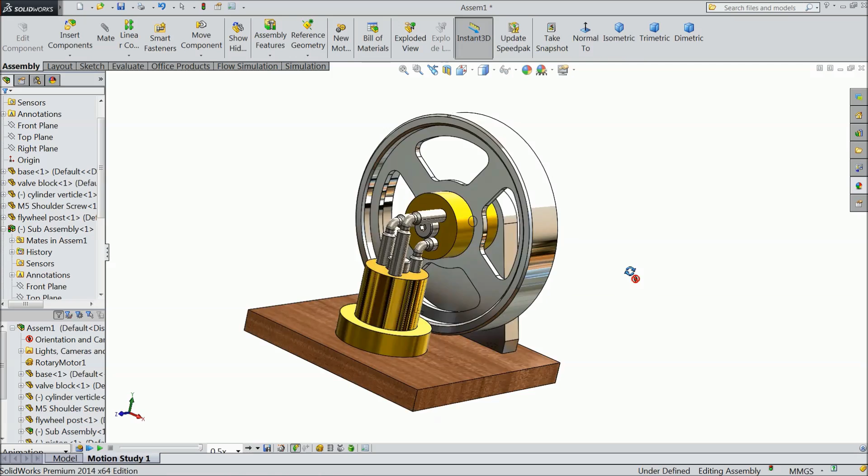Today we are going to design and assemble an elbow engine in SolidWorks. This engine we created in SolidWorks, and we will see how to. This is a very beautiful engine. We will create each and every part, and we will assemble it at the end of this video.

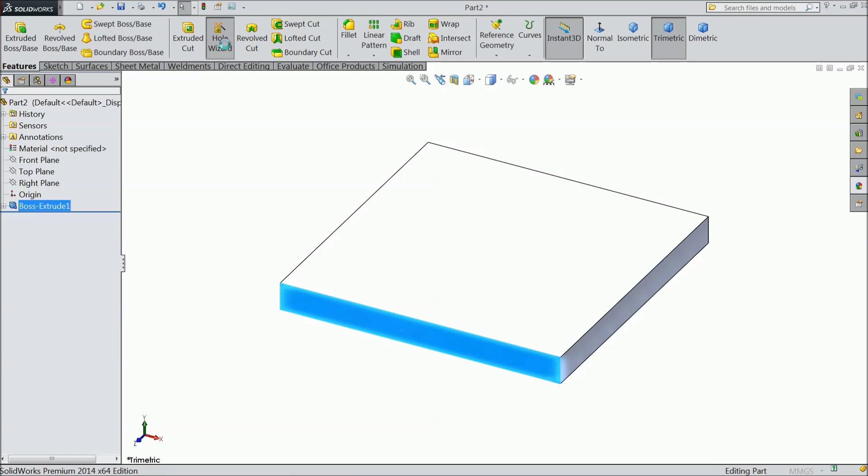Okay. Now select extruded boss and extrude up to 10 mm. Select OK. Now select this face and choose here hole wizard. Now we want to put some holes here. So first we will select legacy hole.

Choose C-bore drill. The values we will select: 3 mm, 70 mm, 5 mm, 10 mm and angle 180 degrees. Choose normal. Now select position. Put two holes. Just escape. Now select center line and draw a center line from one end to another end. Now exit.

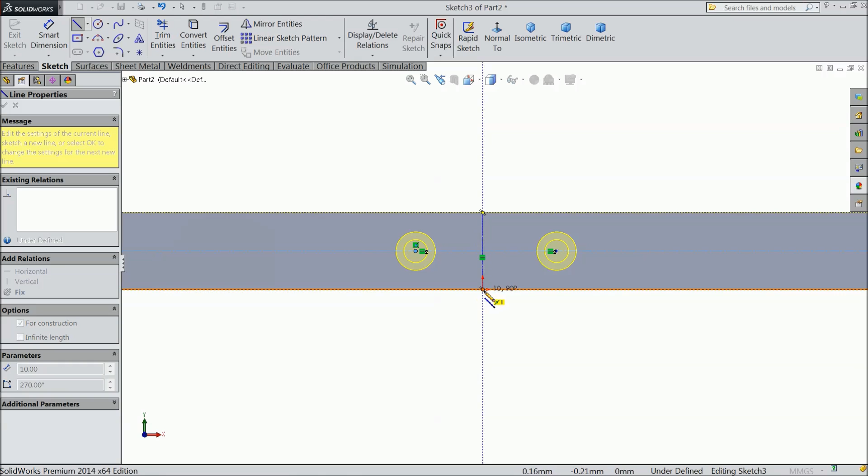Now we will make some relations. Select both the center points of the holes, make horizontal. Now select this center line, and select this point, make coincident. Now again choose center line and draw one mid line from the origin point, exit. Now we will assign one more relation. Select this center line and select both the hole points and make a relation symmetric. See here, symmetric. Okay. Now you just see it is rotating.

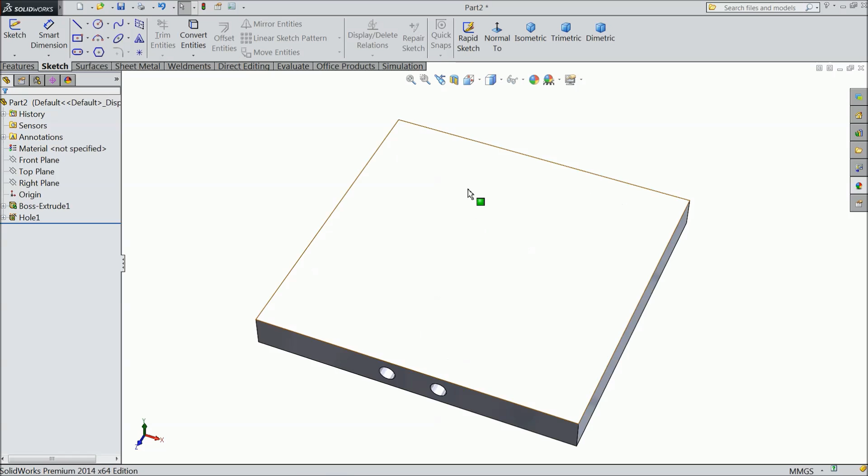Now assign distance from one end to the hole point, 42 mm. Okay, now select OK. Now this is our hole. Choose perspective. Now you can see here. See, this is exactly our holes. Now just go back, select the back surface, choose normal. Okay, this position we want.

Now go select hole wizard. And now here we will select counterbore. We want to create some counterbores. Select ISO and here select socket head ISO 4762 M5. This one keep normal and blind keep up to 8 mm. Now select position. Now put 4 holes.

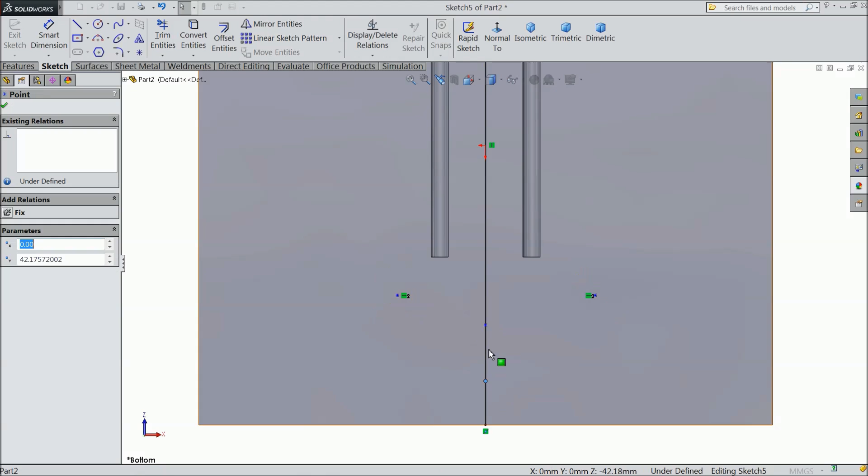Now escape. Now do one thing, draw a center line from top to bottom. Exit. Keep this position. Now assign some relations. Select this hole and this one, make horizontal. This point and this point also, reverse back. Assign relation vertical. This point and this point coincident.

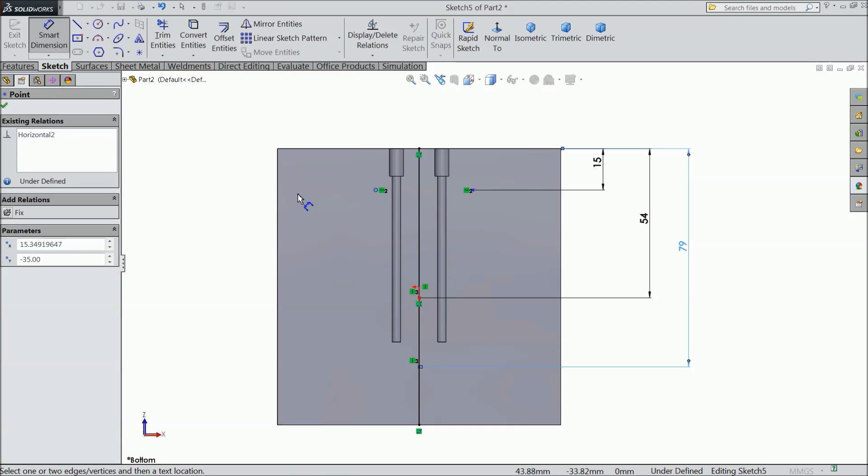Now we will assign some distances from this point to this point, cancel it. First assign the bigger one. From top assign 15 mm. The second one 54 mm, and the third one 79 mm, and this distance from here to here 28 mm.

Okay, now make one relation. Select this point, this center line, and this point. We will do one thing, just click this line and select construction, because we want this line as a construction, not a real line. Now it is construction. Now select these 3 points, make a relation symmetric here. Now it is symmetric.

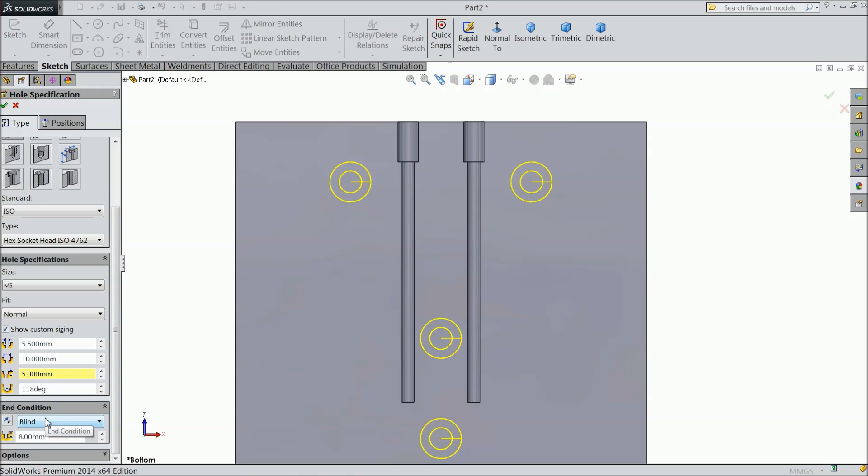Okay, now select the type and here show the dimensions. Select 5.5, 10 mm and this one keep 5 mm. Okay, and this one select through all. We want this hole through all. Okay, now select OK. Now you can see these holes are created. Just select this point. This is the location where we want these holes.

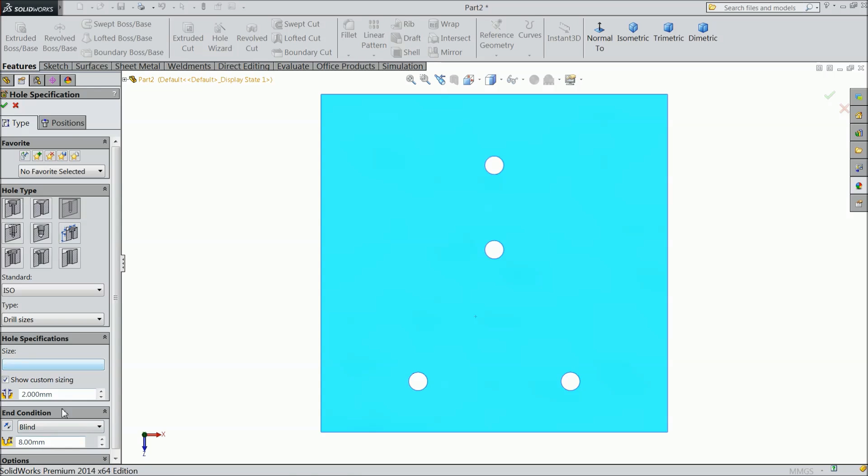Now we will make some holes in the top face. Normal. Select hole wizard. Now this time we will choose standard hole, ISO drill size, and this one blind keep 8 mm. Select position. We want 4 holes. Escape. Now we will assign some relations.

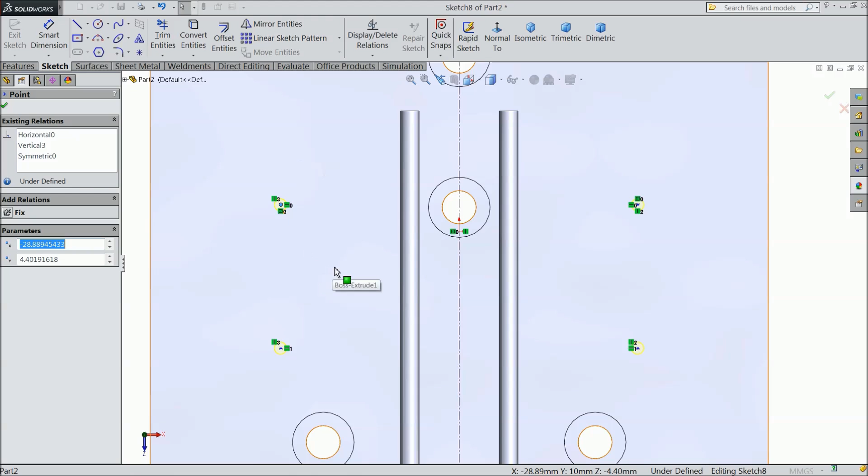Horizontal, horizontal, vertical, vertical. Choose center line and draw one center line. Exit. Now we will assign one more relation. Select this point, center line, and this point, and we will assign relation symmetric. Okay, now just confirm whether it is symmetric or not. Okay, this is moving. Now assign distance.

(42 mm). Distance from bottom, one line 15 mm and another one keep 66.5 mm. Select OK. Select OK. Now see, these holes are created. Now you can see in line view, see the holes are exactly this top face.

Choose perspective. Now right click on the edit material. Now we will assign some material. Go to wood, and choose mahogany, apply, close. Now see, you can see these holes. Select this face, normal, choose line. See these holes, straight holes.

So this is the base for elbow engine. Just save it as a desktop, choose base, create new folder and name it elbow engine. Now save base. Now let's move for next part. I hope you enjoyed this part.

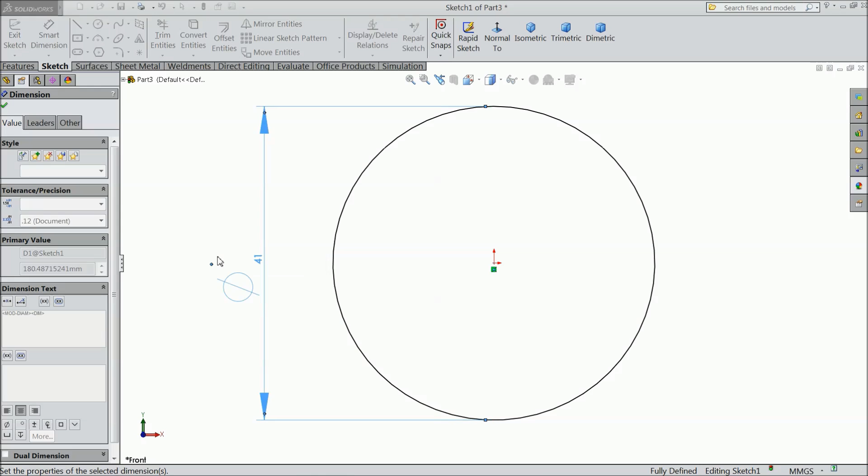Now we will sketch next part, valve port block. This block, so let's start. Choose front plane. Draw a circle from origin point and keep the diameter 41 mm. Select extruded boss, choose mid plane and keep 10 mm. OK. Now select this face, select hole wizard, select normal.

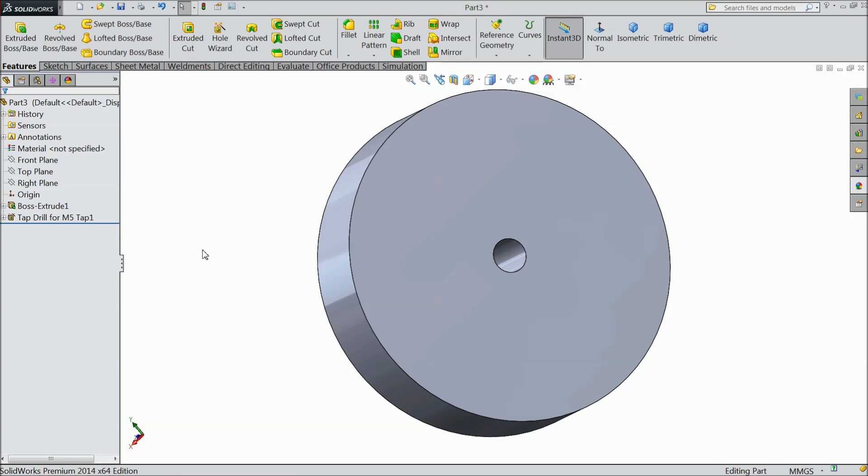Now we will choose hole, ISO and choose tapped drill. And now here we will choose M5 and we will select through all and we will assign at the center. Escape, select OK. Now just go back, select this back surface, hole wizard, choose normal.

Now we will assign some more holes here. So choose normal hole, tapped hole, select M5 and choose custom size. Keep blind 5 mm. This one keep 4.2 mm. OK. Select here, escape.

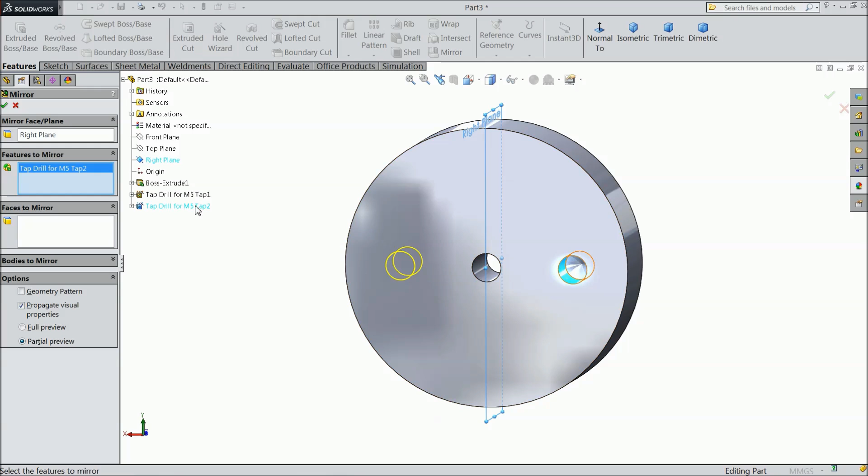Now assign distance between both the circles 12.5 mm. OK. Now select the center point of both the holes, make relation horizontal. Select OK. Now we want to make mirror this hole, so just select mirror, choose right plane and select this hole. Now it's going to be mirror here. OK. Now again select front plane.

Now again we want to select some holes here. No, we will better select sketch. We want to draw some sketch, normal. Now select center point arc slot and we want to draw some slot. Now exit. Now select center line, connect from midpoint to origin point, exit. Now select this line, make relation vertical. Now assign radius for both inner and outer.

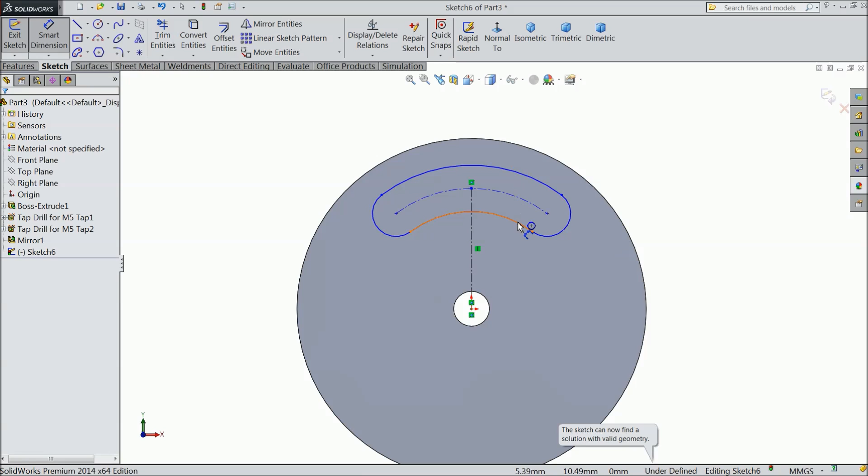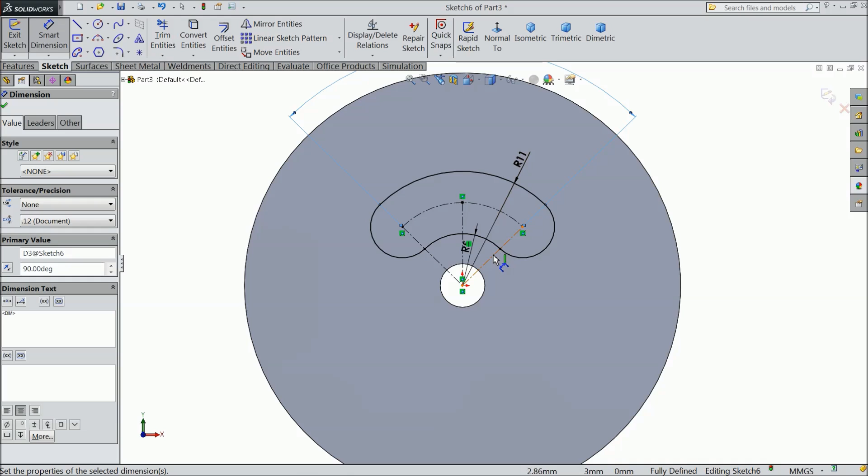Keep 11 mm radius, inside keep, delete. Inside 5 mm. 11 mm. Okay, this is what we want. Choose center line and connect from 1 and 2 origin point, then this point. Now exit. Now assign the angle, make 90 degree. Okay, this is the angle. Now select extruded cut. We want to cut only up to 2.5 mm inside. Okay.

Now do one thing. Select this sketch. Click here show. Now select this inside surface. Hole wizard. Normal. Now we want to select hole, ISO hole, and here select drill size. Choose 2 mm and here select through all. Select position, so select this position.

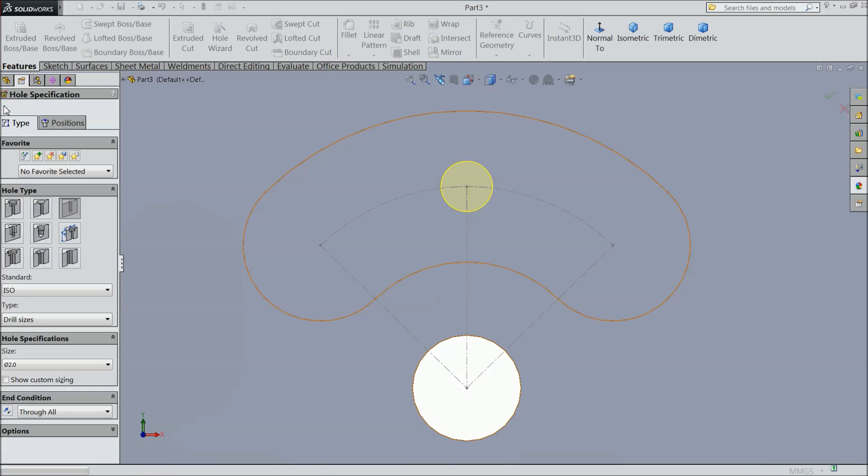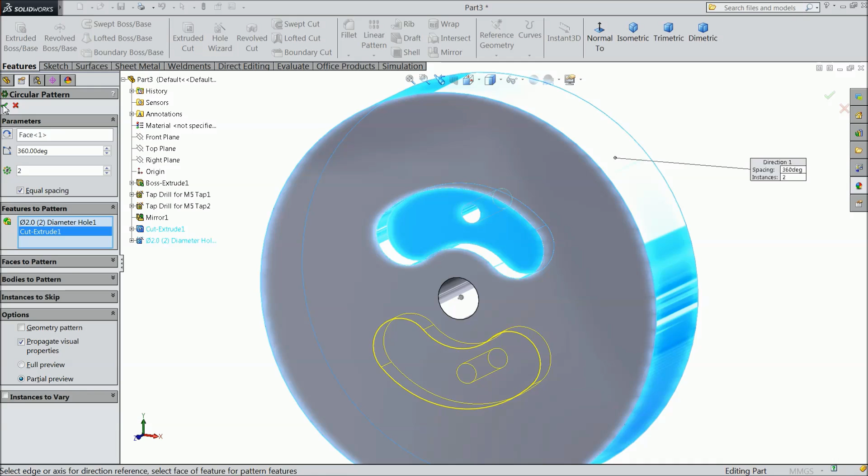Now we will assign some appearance. Go to appearance, metal, and we will assign some brass finish. Select the whole material. Cast brass. Now save as. Valve block. Now let's go for next part.

Now we will sketch horizontal cylinder, vertical cylinder. So first we will select top plane, sketch, draw a circle from origin point, keep the diameter 28 mm. Okay, now extrude it up to 24 mm and choose mid plane, 24 mm mid plane. Okay, now select this top face and hole wizard. We want to put one hole.

Select hole, ISO hole, drill size, and size make 6 mm. And choose through all. Select position and put at the center. Escape. Okay. Now again choose hole wizard. Same hole we want to put it again. ISO drill size. Choose the position.

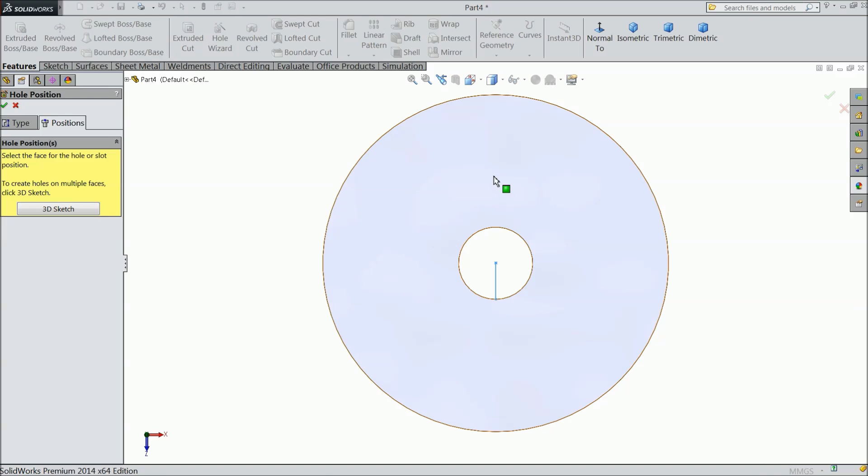Okay, select this face, select here. Now choose smart dimension, and assign the distance. Keep 8 mm. Select OK. Now select center point of both the holes and make relation vertical. Select OK. Now see, the holes are created.

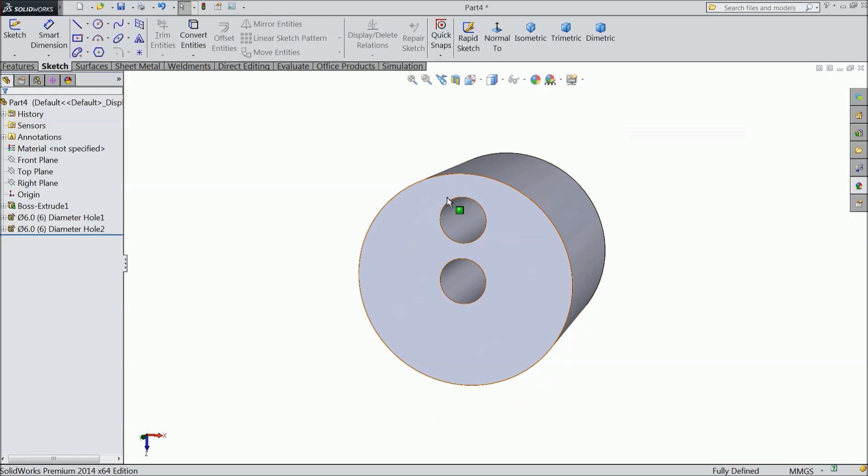Now we want to make 3 number of these holes, so just we will pattern it. Choose circular pattern, select this hole. We want 3 number of holes, equal spacing. OK. Now this is created. Now just assign brass finish. This is the brass finish material actually.

This is the vertical part of the cylinder. Just save it as cylinder vertical part. Now we will create the cylinder horizontal part from the same drawing.

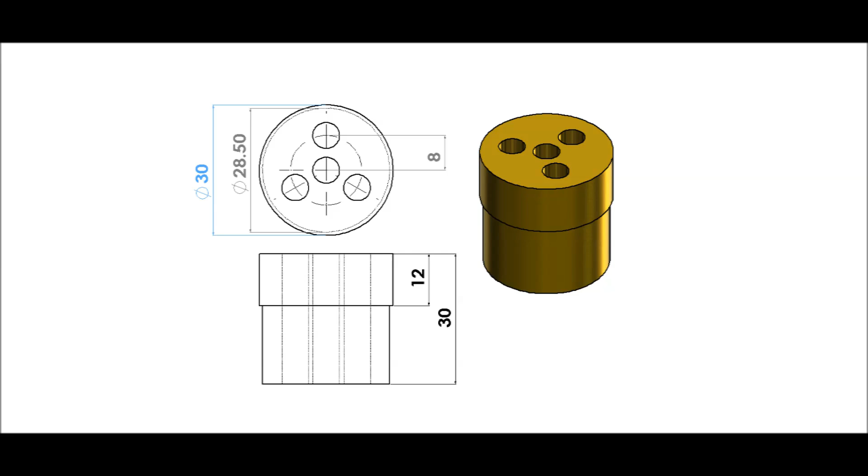Now we will create the horizontal cylinder from the previous cylinder. So just edit this cylinder, sketch, edit this sketch, make 28.5. OK. Now select extrude, choose 30 mm. OK.

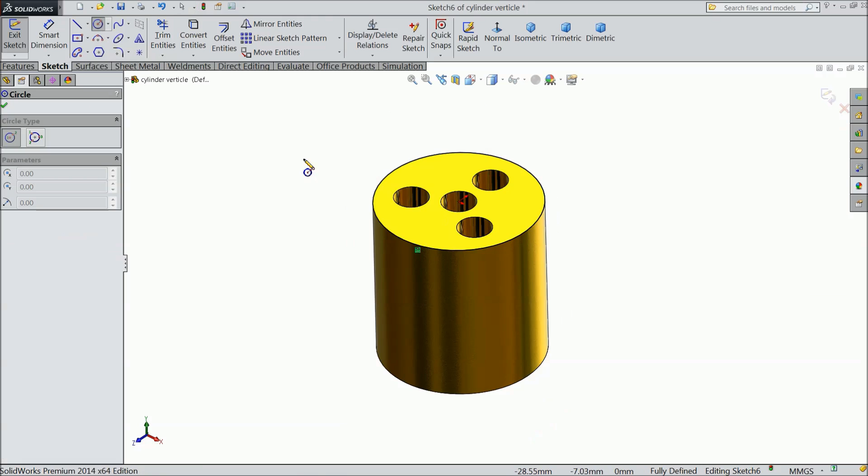Now select this face, sketch, select this outer line, click convert entities, select circle and draw one circle quite bigger than this and keep diameter 30 mm. OK. Now select extruded boss. Select 12 mm and choose reverse direction. OK.

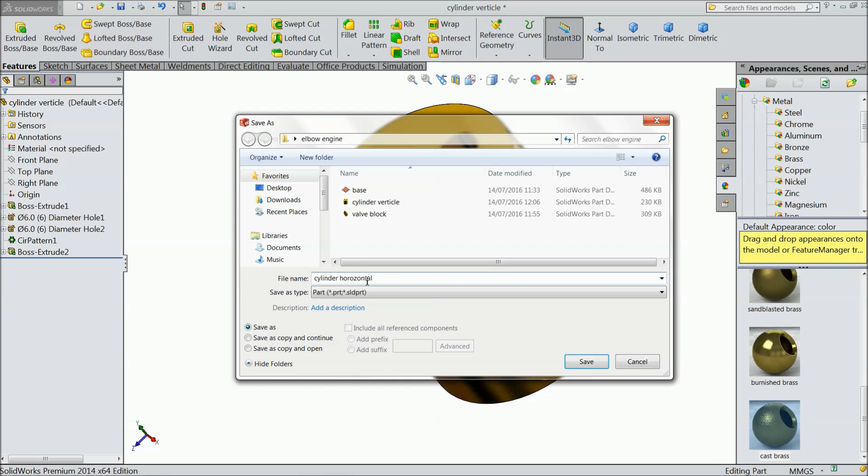Now this is our next cylinder, the horizontal cylinder. We will assign this also burnished brass. Actually, cast brass looks better. Now save this part as cylinder horizontal. Now we will go for the next part.

Now we will sketch the flywheel post. So let's start. Choose front plane, sketch. Draw a circle just above the origin point. Select center line and connect from one end to the origin point. Now exit. Now let's assign the length.

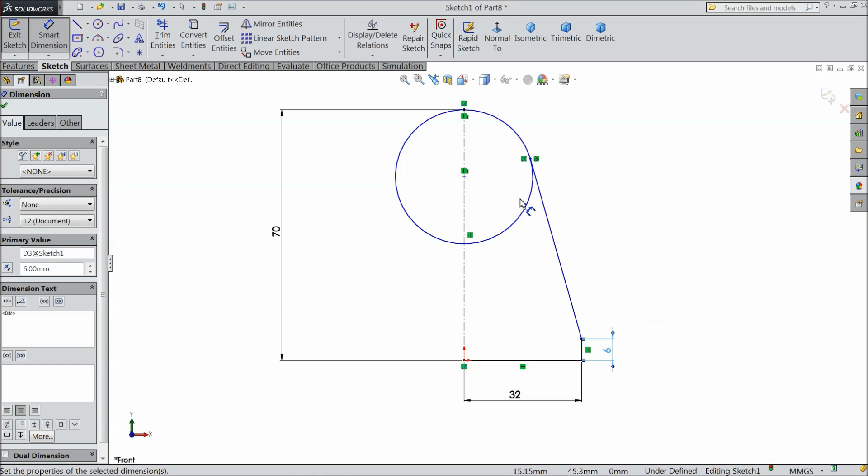Keep 70 mm. Choose line and find the tangent point here. Now exit. Now select both these things, select tangent. Now there is a tangent relation. Choose smart dimension: 32 mm, 6 mm, and keep the diameter 35 mm.

OK. Choose trim entities. OK. Select mirror. Mirror about this line. Select OK. Now select extruded boss, choose mid plane 10 mm. Okay.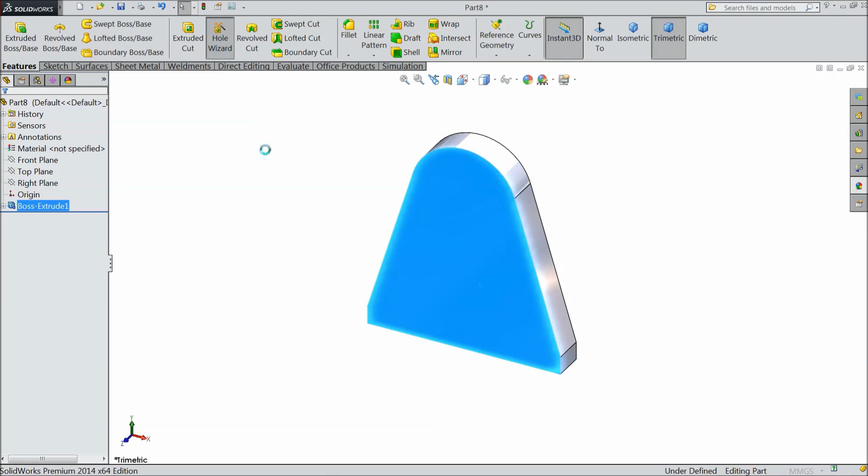Now select this face, hole wizard, and we want to put a straight tap, ISO tapped hole, and choose here M5 and select through all, and choose position, escape, select dimension and assign position.

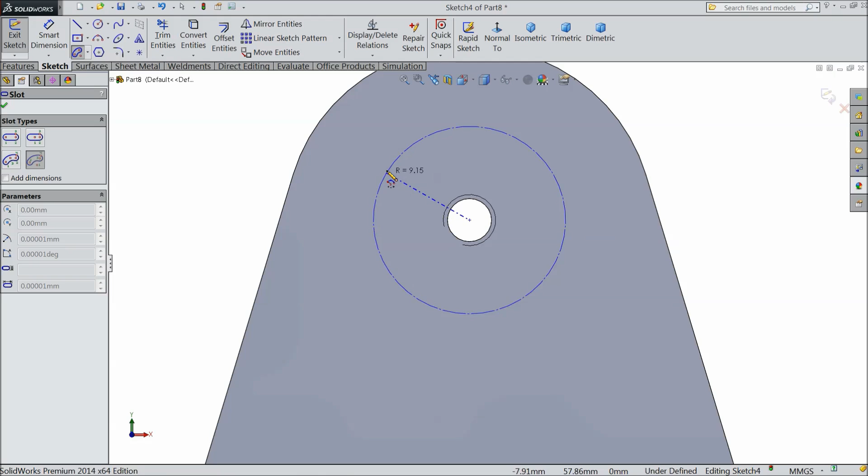53 mm. Okay. Now select this center point and origin point, make relation vertical. Okay. Select OK. Now this tapped hole is created. Now select this face, sketch, normal. Now select centerpoint arc slot. Exit.

Connect one center line from here. Select this line, make relation. Keep radius 3 mm, 11 mm. Okay. Now select extruded cut, 2.5 mm inside. Okay.

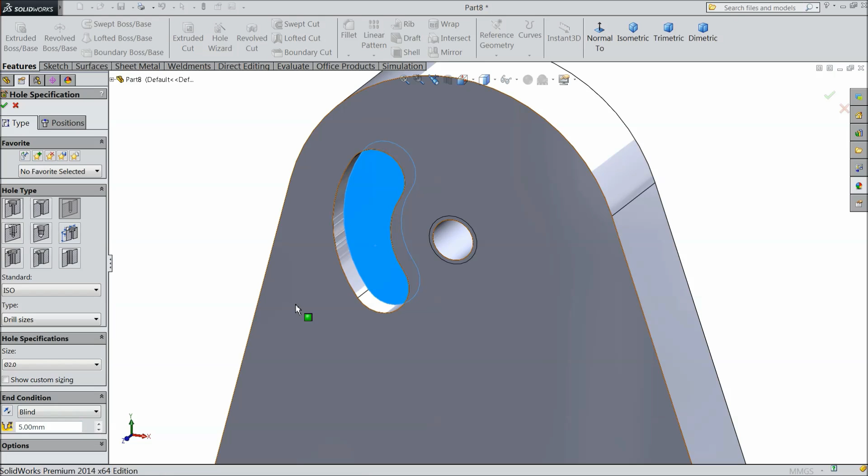Now select this face, select hole wizard. Now we want to make a simple hole. Select 2 mm diameter and up to length 5 mm. Select position, choose normal, escape. Now assign, select this line and click relation, choose length 8 mm. Select OK, choose OK. Now see, the holes are created.

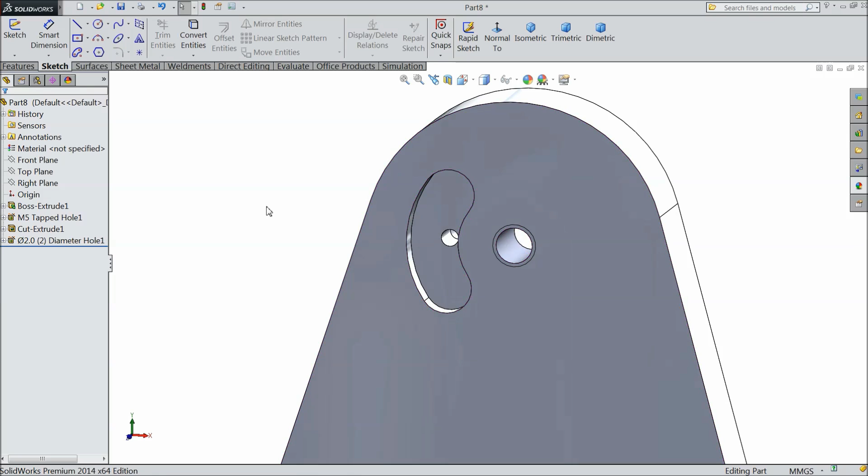Now we will edit this hole. Select this face, choose normal. See, the tap hole is quite outside, so do one thing: just go here, right click and select edit sketch plane, and select this face as the plane. Okay. Now select this face, normal. Now see the hole going back. Okay.

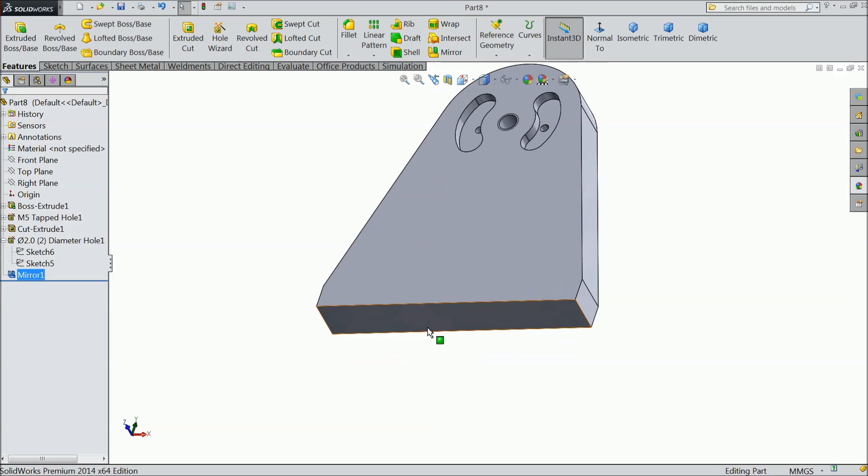Now we want to mirror these two holes. Right plane, mirror this 2 mm hole and this cutout. Okay. Now see, it is mirrored. Now select backside, hole wizard, choose normal. Now here we want to make some simple holes. Drill size 2 mm, blind 5 mm.

Blind length keep 5 mm. Choose position, select one hole here and one hole here. Now escape. Now select with shift key this point and origin point, make relation vertical. Okay.

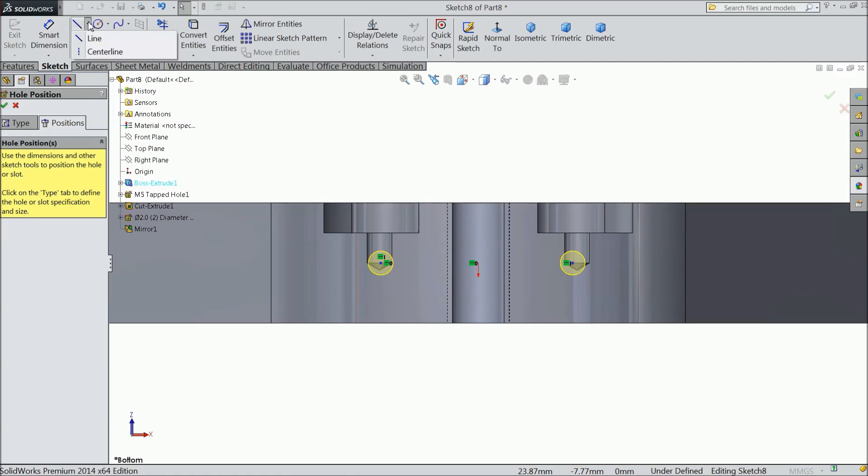Draw a center line. Now select this point, this line and this point, make relation symmetric. Now assign the length, select 24 mm, OK. Now select OK. Now again choose this face,

hole wizard, normal, and this time choose straight tap, choose tapped hole, select M5 and blind keep 12.4 mm, keep length 10 mm. Select position, one here, one in the opposite direction. Just press escape to escape this hole. Repeat the same procedure.

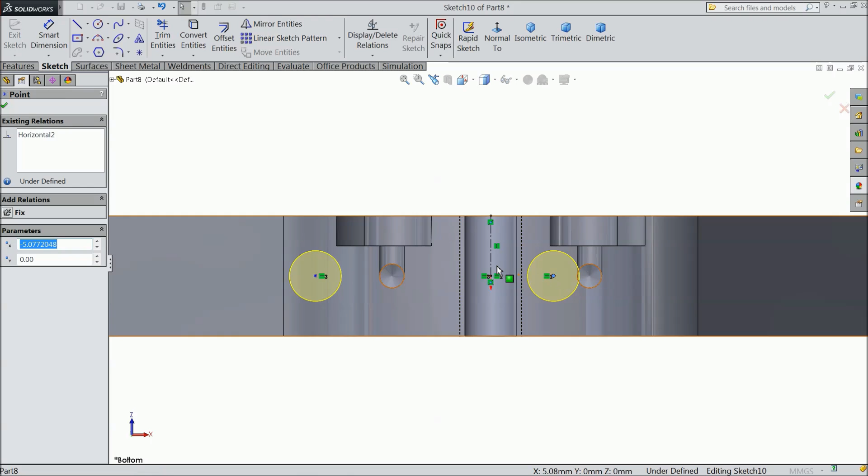Select center point, origin point and center point of hole, make relation horizontal. OK. Again choose center point, center line and this point, make relation symmetric. Now assign the distance from here to outside, 10 mm. OK, select OK. Now you can see the hole. See, it is a long hole. You can see here.

Now edit the material: right click, edit material, apply chrome stainless steel, apply, close. See, this is chrome stainless steel. Now save as flywheel post.

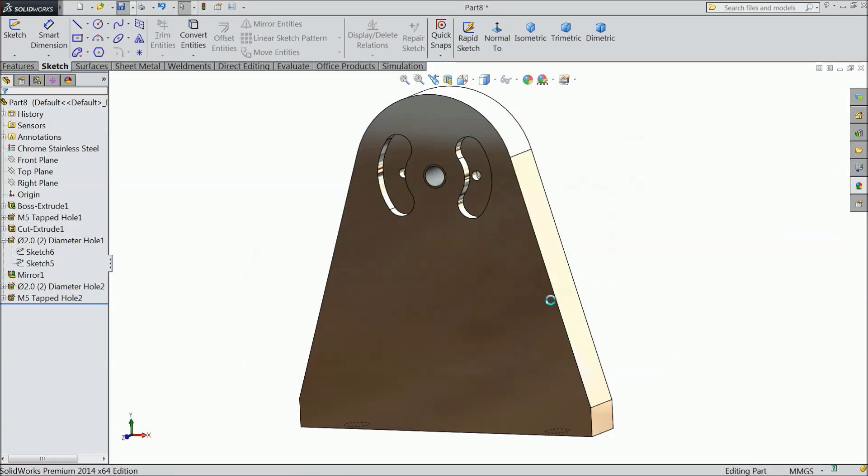Now we will create flywheel web. So let's start. Choose front plane, sketch. Draw two concentric circles. The bigger one keep 90 mm and 25 mm. Select extruded boss. Choose 3 mm mid plane.

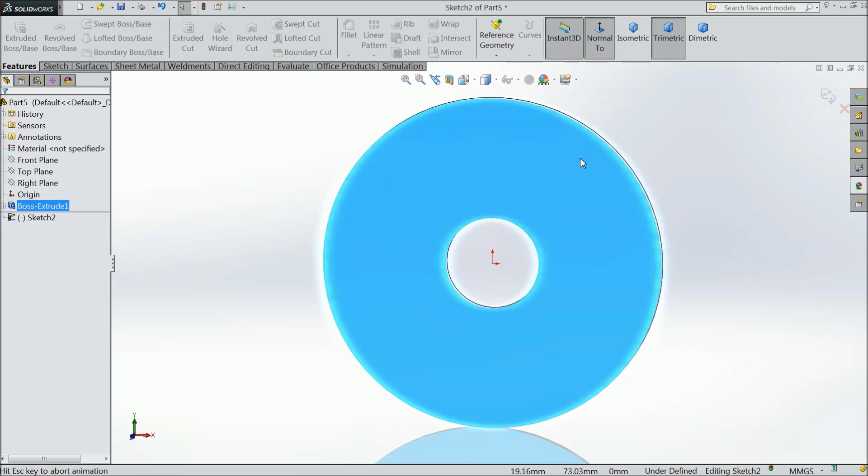Now select this face, sketch, normal. Select center line, draw line from one end to this end, exit. Now choose offset entity, 6.35. Select this line, select reverse, select this line also. OK. Now select circle and draw two circles, one small and one quite bigger.

OK. Now choose trim entities and trim unnecessary lines. OK, this cutout we want. Now assign radius. Bigger outer radius 40 mm and inside radius 20 mm. OK. Now select extruded cut, choose through all. OK.

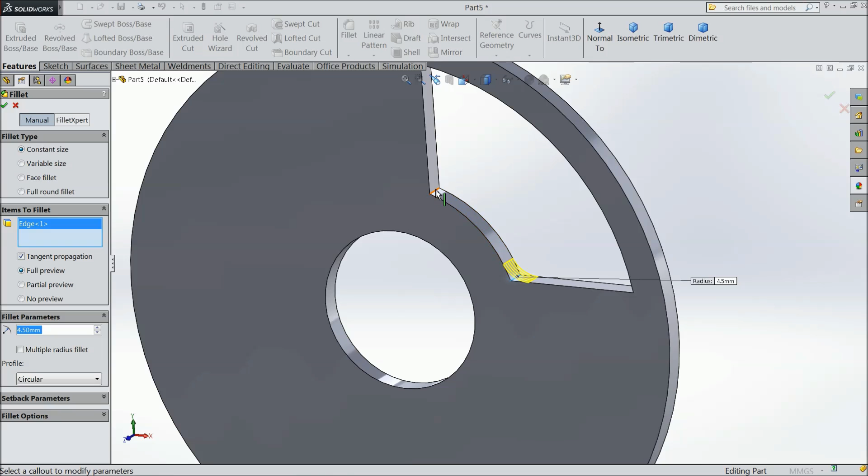Now select fillet, 4.5 mm and select all the four corners. Select OK. Now we want to make circular pattern and we want 4 number of cutout like this. Choose this inside, select 4 numbers and select here 2 parts cutout also. See,

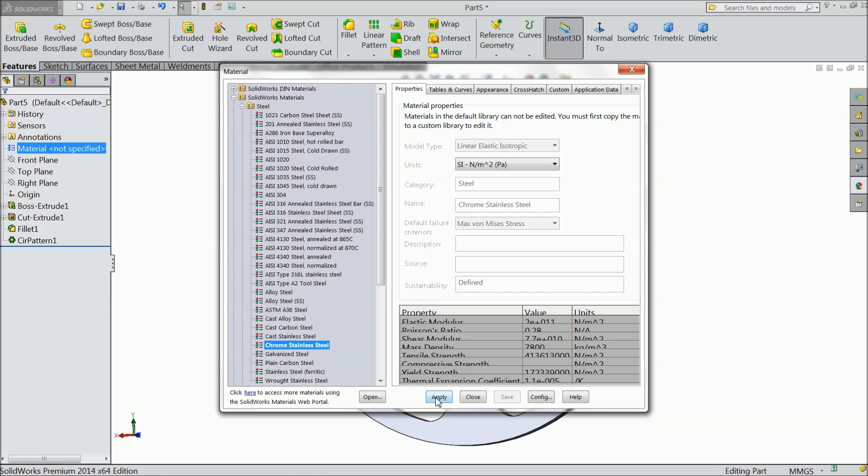now right click, edit material and assign stainless steel, chrome stainless steel, apply, close. This is the chrome stainless steel. Now save as flywheel web.

Now we will go for next part, flywheel rim. Now we will sketch next part, flywheel rim. So select front plane, sketch. Draw two circles, one small and one big. Now assign the diameter. Outer 100 mm and inner 88 mm. Select extruded boss. Keep mid plane and width keep 20 mm. Okay.

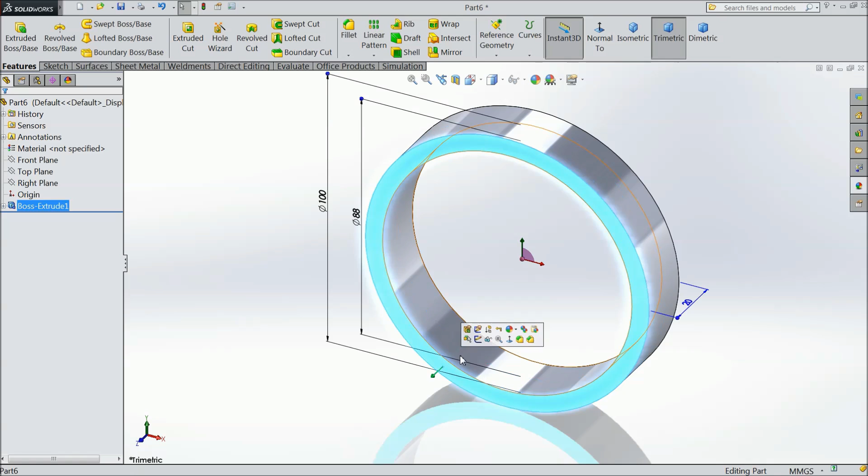Now select this face. Sketch. Draw a circle and keep the diameter 90 mm. Okay. Now select extruded cut up to 8 mm inside only. Okay. See, only 8 mm inside. Choose chamfer. Keep 1 mm, select clear. Select this face and this face. Even you can select backside face also. Okay.

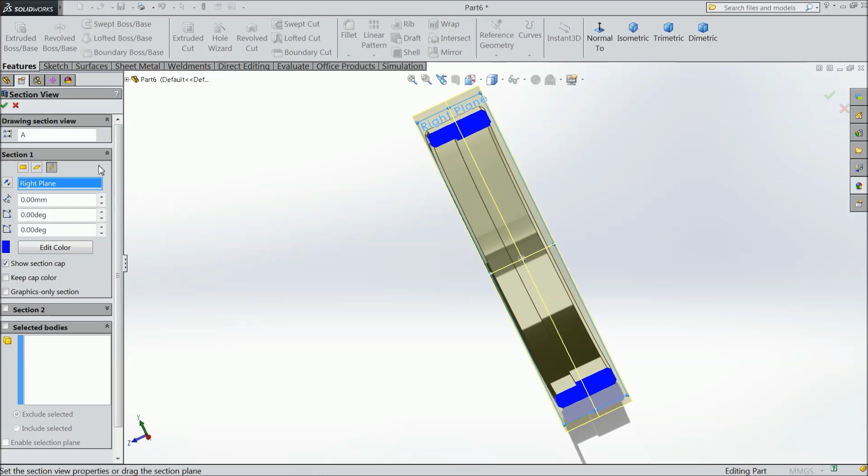Now edit material and assign chrome stainless steel. Apply. Close. See. So save as flywheel rim. Now move for next part.

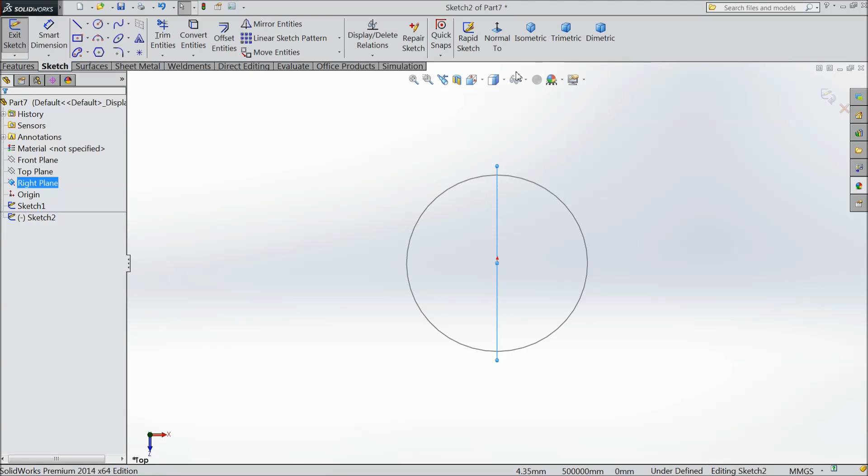Now we will sketch elbow piston for elbow engine. So let's select top plane, sketch. Draw a circle and keep the diameter 4 mm. Now exit from the plane. Now choose right plane, sketch, select normal. Select a line. Draw one vertical and horizontal line. Now assign the length. 34.5 mm. 34.5 mm.

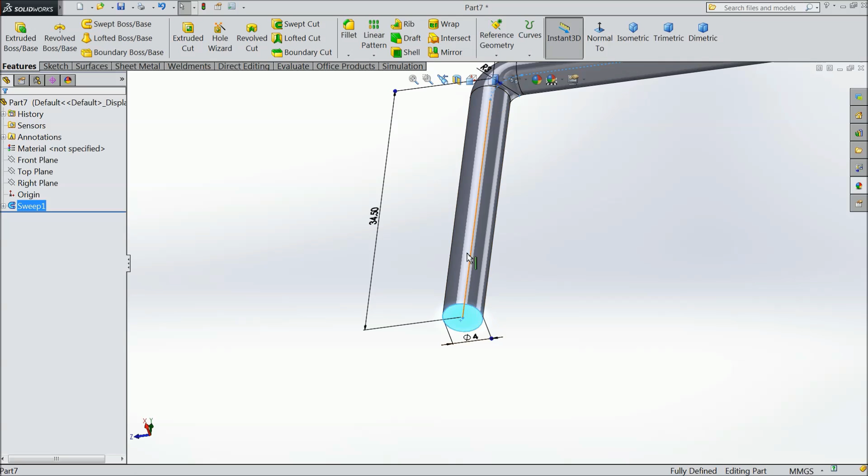Now keep the radius 3 mm. Select OK. Now exit from the sketch. Now we will use swept boss base command. Choose this circle. See. OK. Now just select back surface, sketch, draw a circle here and keep the diameter 8 mm, 6 mm.

Select extruded boss, keep 28.5 mm reverse direction. See. Okay. Now the same for the other side. Sketch, draw a circle and keep the diameter same, 6 mm. Select extruded boss, 28.5 mm reverse direction, choose OK. Now assign fillet 1.5 mm and select inside circle. Select OK.

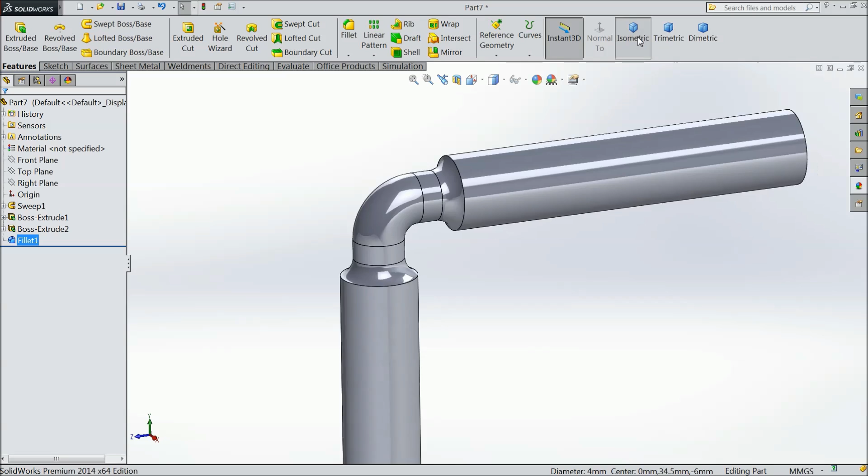Now right click, edit material and we will assign material AISI 1020, apply, close. So this is the cylinder piston. Just save as piston.

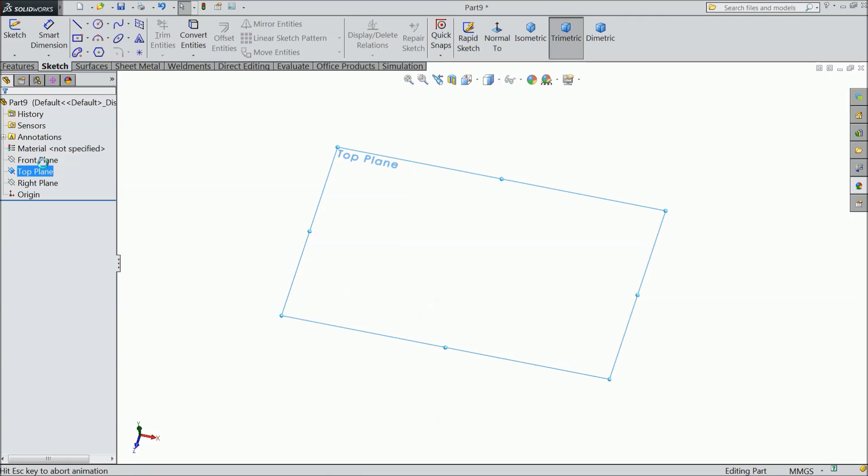Now we will create M5 shoulder screw for elbow engine. So let's start. Choose top plane, sketch, draw a circle and keep diameter 10 mm. Select extruded boss only up to 5 mm. OK. Now select back surface, sketch, draw a circle and keep the diameter 5.5 mm. Select extruded boss only up to 0.5 mm.

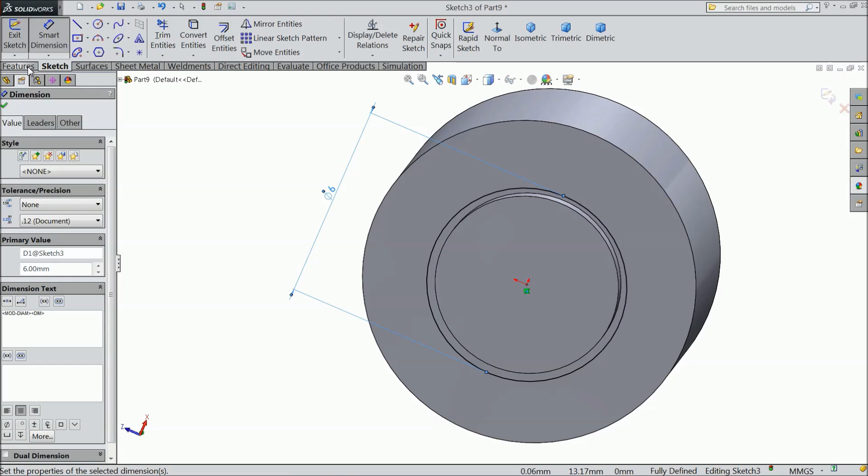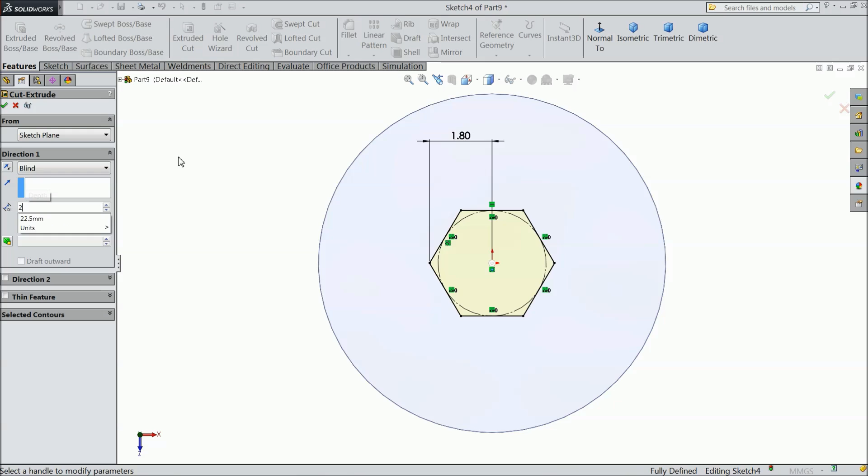OK. Again select this face, sketch, draw one bigger circle than this and keep the diameter 6 mm. Select extruded boss. Select up to 22.5 mm. Now select this face, sketch, normal. Now select hexagon. OK. Select this line and choose relation. Now assign distance 1.8 mm and select extruded cut up to 2.5 mm inside.

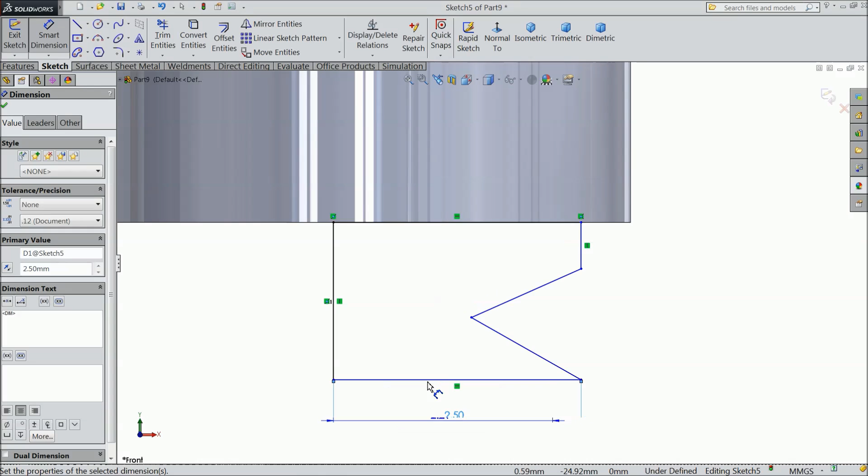Choose fillet 0.5 mm and select this outer line. Again choose fillet, select this inside surface. OK. Now select front plane, sketch, normal. Now we will create some ordinary threads. It is not real thread but it looks like real thread. Select a line, exit from the line. Now we will assign some length. 2.5 mm, 0.2 mm.

One mm. OK. Select this line and this line, make relation equal. Now assign angle 60 degree. Select OK. Now choose revolved boss base. Select this line as an axis. Choose OK. Now select linear pattern, or first select axis, select this cylindrical body and this axis is going to be created, choose OK.

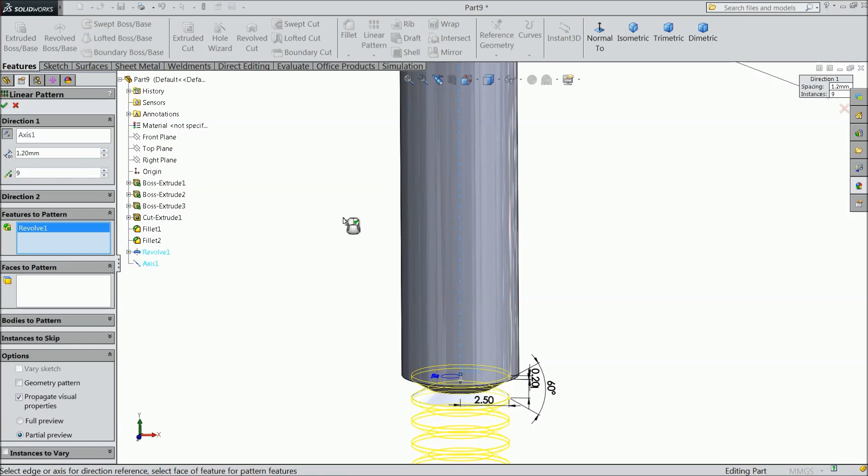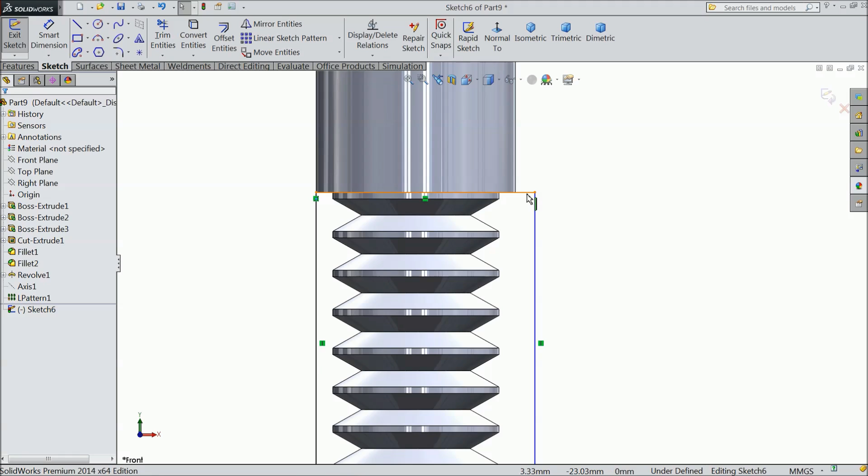Now choose linear pattern, select this revolved body, select distance 1.2 mm and 9 number of threads we want. Now hide this plane, this axis. Now again choose front plane, sketch, normal. Now we want to just cut some portion of this. Select corner rectangle and draw from one end to another end. Select this line and this line, make relation collinear and assign the length 10 mm.

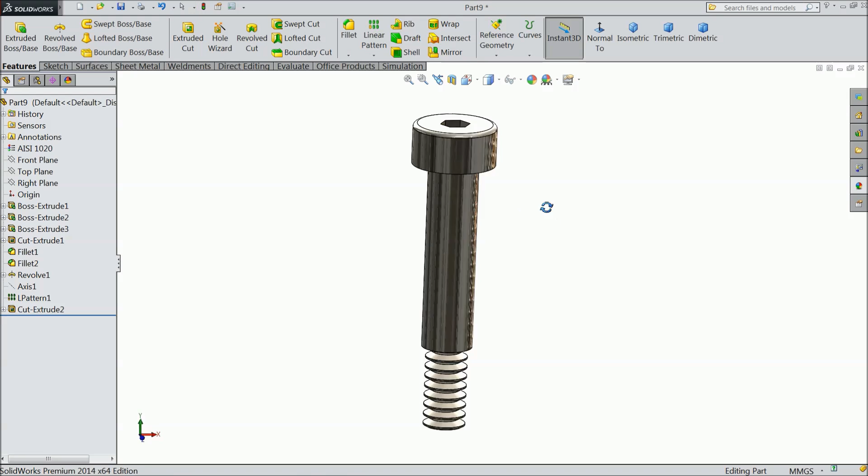Now again choose corner rectangle, exit. Now we want to extrude this portion, and here choose this portion. Choose mid plane and select through all. Okay. Now see. Now assign material, edit material, AISI 1020, apply, close. Now this is our shoulder bolt. Save as.

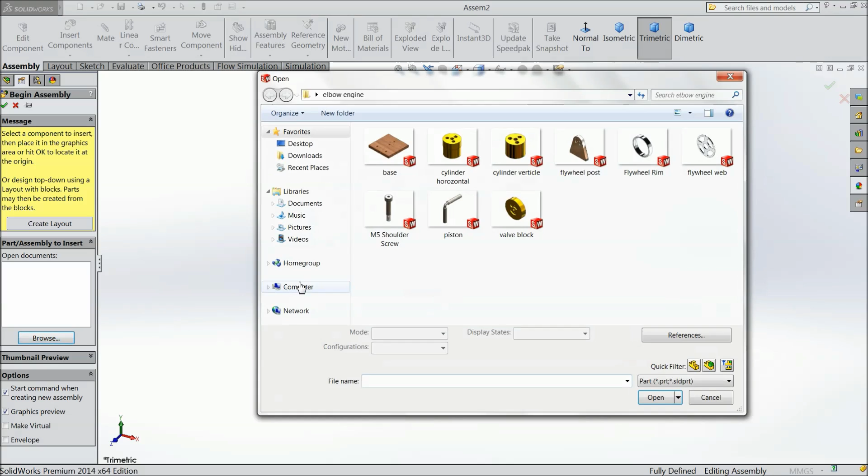Browse the part and first browse flywheel rim. Okay. Now again browse flywheel web. Okay.

Now assign the relation. Select this face and select the back side. Okay. Now select this upper face and this round face.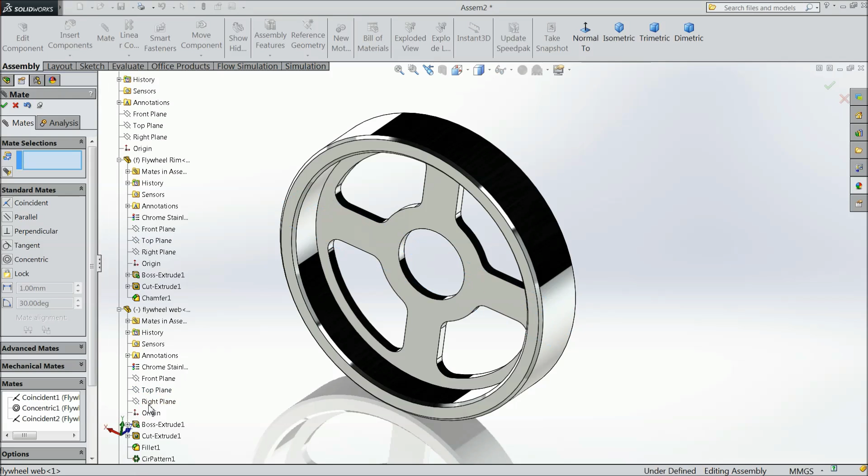Now these are rotating inside, so we will make some relation in between. Let's say this one top plane, top plane. Select OK. Now both will rotate together.

Now insert next component, horizontal cylinder. Choose mate. Select this face and this face. Concentric. Okay. Now select this face and this face. Okay.

Now see, it is rotating. It should rotate, but it should rotate with this. So we will assign some relation.

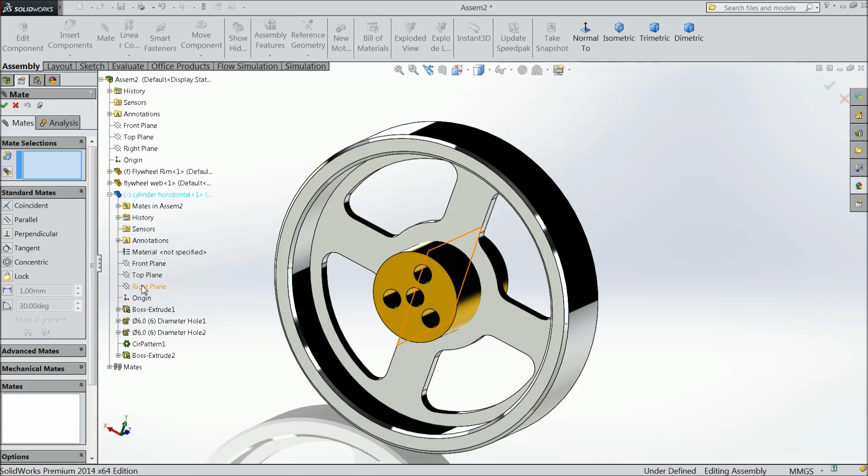Select right plane. See the right plane, the holes here, right plane and the right plane of this. Make relation parallel. Okay. Now our body is ready.

So this is our sub assembly. Save as sub assembly. Now we will go for the main assembly.

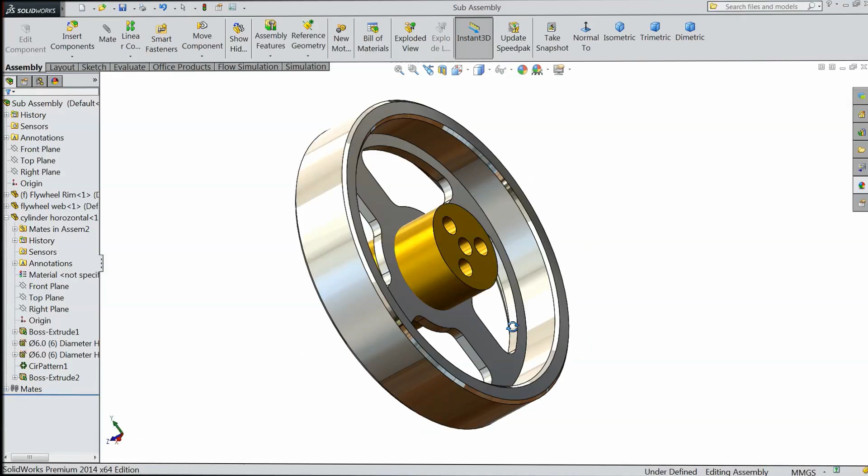Now we are going to start the assembly of the elbow engine. So let's start. Choose new assembly. Okay. Now browse the part. First select base. Open. Okay. Keep plain white and perspective. Now right click this body and select float.

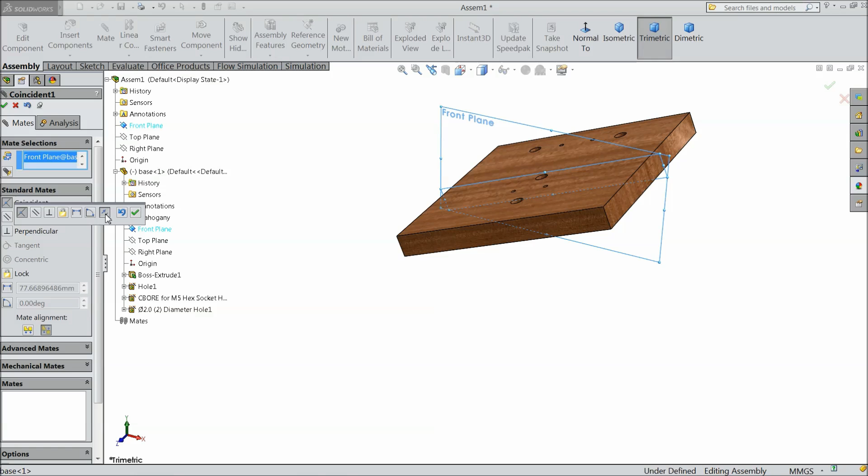Now we will assign some relation. First select front. Keep reverse. Okay. Now choose top. Top. Okay. Now select right plane. Right plane. Okay. That's okay. Now this body is fixed.

Now choose insert component. This time we will insert the valve block. Okay. Just rotate this block. Okay. Now we will assign some relation.

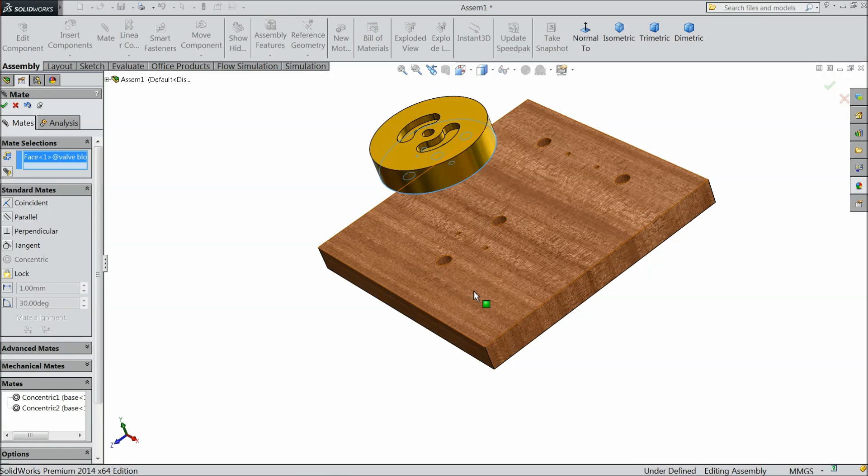Choose mate. Select this hole. Select this hole. Okay. Select this hole. Okay. Select back side of block and this face. Okay. Now this part is fixed. Okay. Now browse next part.

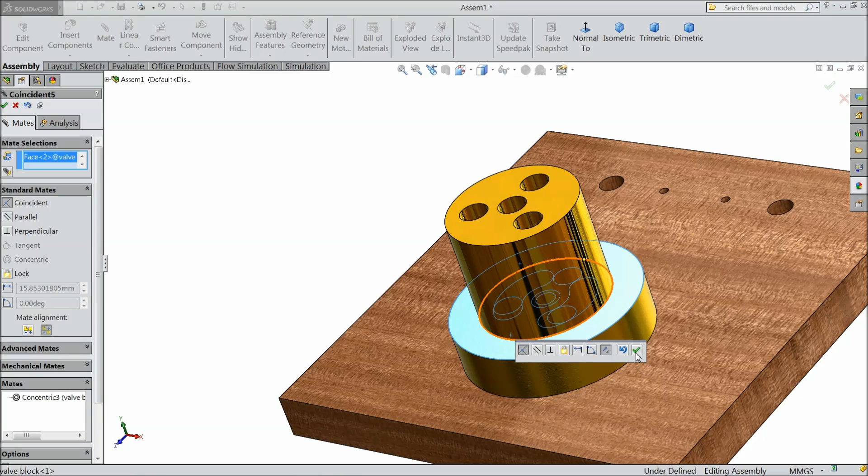Vertical cylinder. Okay. Now select this face and this cylinder. Mate. Concentric. Okay. Now this face. Okay. Now see, it is rotating. It should be rotated.

Okay. Now browse the next part. Screw shoulder, M5 shoulder screw. Choose mate. Select this and this. Okay.

Select this back surface and this surface. Okay. Now see, it is still rotating. So select this one face and this face. Okay. Now it will not rotate. Okay.

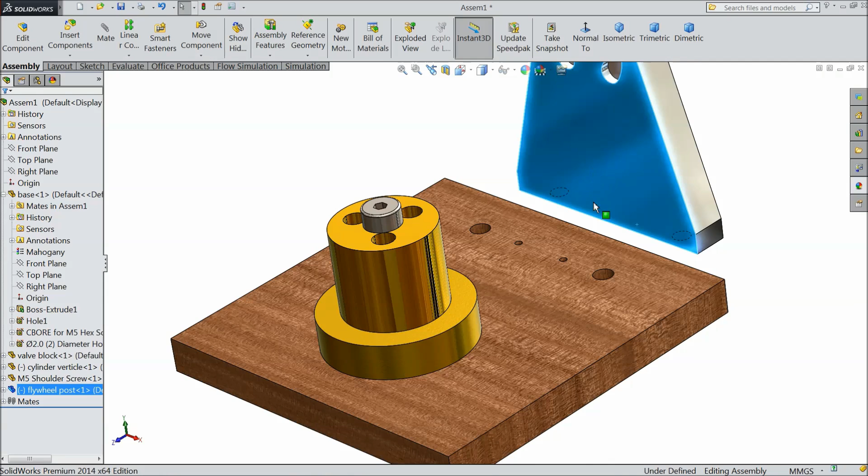Now insert flywheel post. Now select this hole, mate, back side of this hole. Okay.

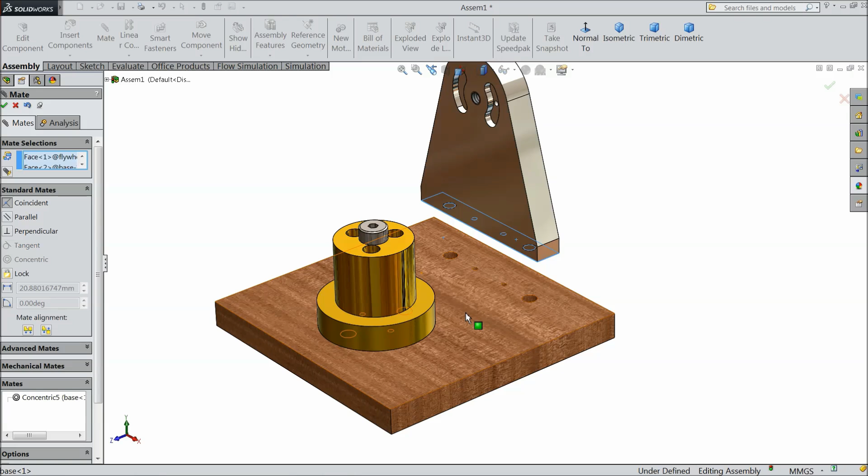Select this hole. This hole. Okay. Drag it out. Select back surface. This surface. Okay. Now this part's fixed. We will go for next part.

Now we will browse the next part, our previous sub-assembly. Select all files. This is the sub-assembly we created before in this assembly.

Now choose mate. Select this circle and this circle. Make concentric. Okay. Select this face and select this face. Okay. Now it is rotating.

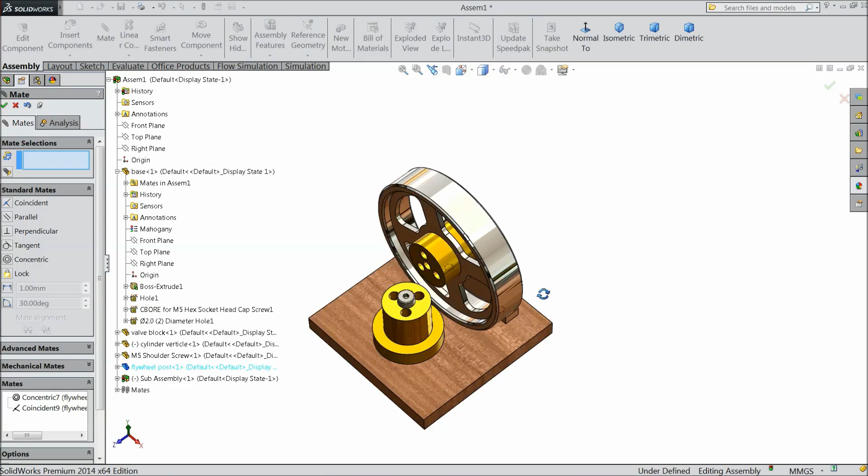Okay. Now we will insert more parts. Now select piston. Just press Ctrl key and drag and drop. We want 3 pistons.

Choose mate. Select this hole. Okay. Select this hole and this piston. Okay. Now see it is rotating. Now select second one and this piston. Okay. This hole and this hole. Okay. The third.

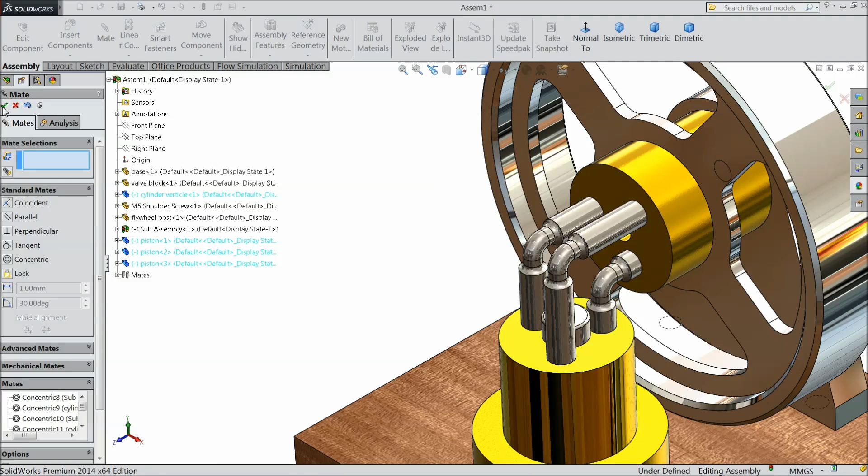Okay. Select OK. Select OK. Now see, we have located all the relations. Now see it is rotating.

Now one more thing's balance, the shoulder screw. Choose mate. Select inside hole and this. Reverse. Okay. Select back of bolt head.

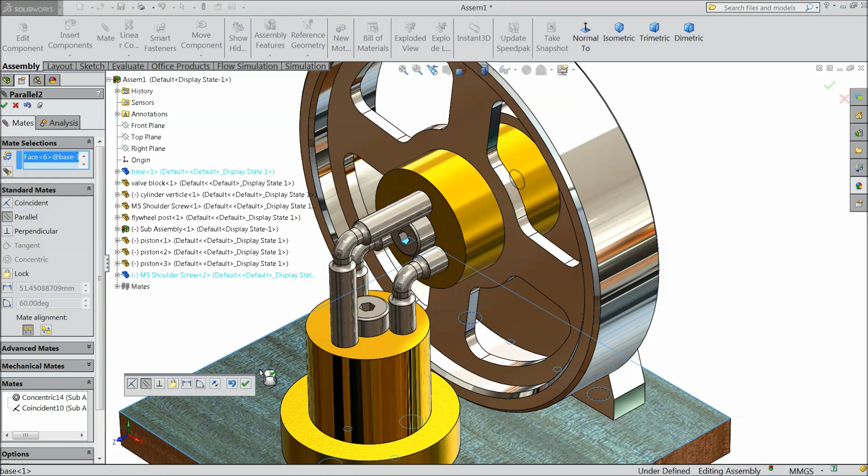Select this face. Okay. Now select inside face and this face. Parallel. Okay. So it will not move. Okay. Now see it is rotating.

Now play. See, our engine is playing. This is the elbow engine. I hope you enjoyed.